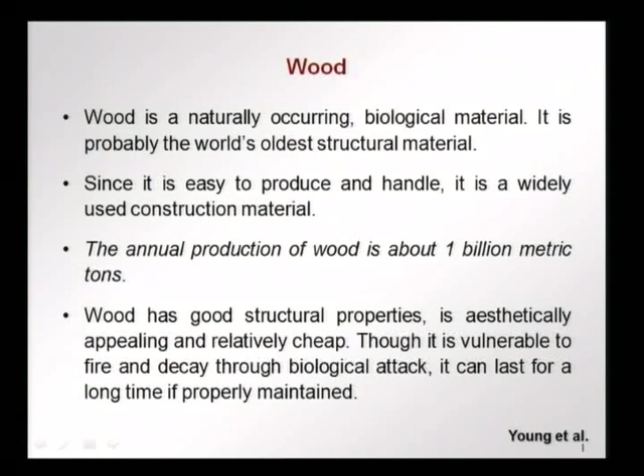Let us compare the properties of wood with some other materials. In this table, what we have done is looked at 4 different properties with reference to the density. So the materials that are compared are wood, mild steel, aluminum alloys and concrete.

In the first column, we have the Young's modulus divided by the density, or the elastic modulus normalized with the density, and you find that wood has a value of 20 to 30, same range as mild steel and aluminum, and better than concrete, which is obviously much heavier.

In terms of the tensile strength, again divided by the density or relative to the density, we have wood having values of 120 to 170, much better than mild steel and comparable to aluminum alloys, and much better than concrete, which is very weak in tension and also has a high density.

In terms of the compressive strength, again wood has good values 60 to 90, which is comparable to aluminum and much better than concrete.

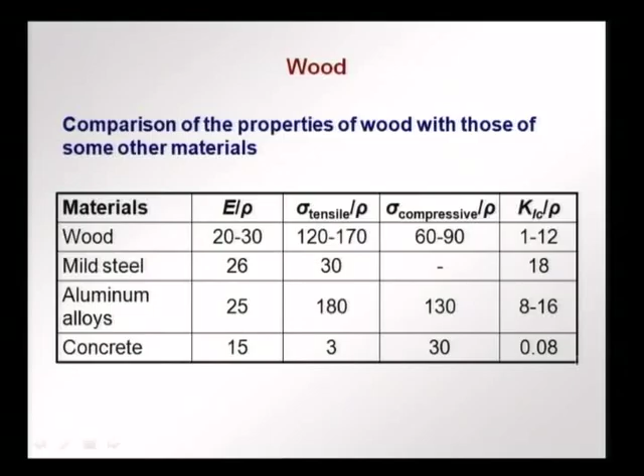So we find that in terms of unit weight, in terms of properties with respect to the unit weight, wood comes out very strongly compared to other materials, and therefore it is a structural material that has been used for a long time and will continue to be used as long as it is available.

Wood, however, is more complex than many other materials, because first of all it is a natural material. There are at least 30,000 species of trees, and many of these are used to give us construction materials, and this variability between the species alone leads to a tremendous variation in the properties of wood. So depending on the species of tree, we can have very different properties, and that is why we have certain types of wood which are more common in construction or more ideal for construction.

Wood is a composite material where we have a variety of properties at different scales, and therefore the analysis and the modeling is to a certain extent complex. Being a natural material, it can have a lot of flaws and imperfections, which again can control the structural behavior. Lastly, an aspect which makes wood again very different from other materials is that it is anisotropic because of the way the tree grows.

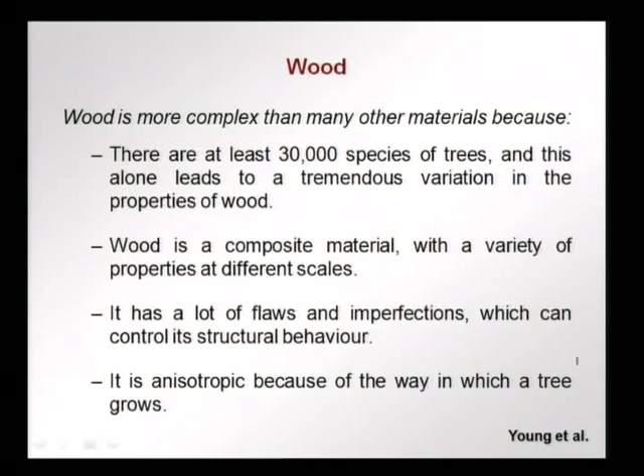Trees are divided into two broad classes: hardwoods, which are basically tropical broadleaf deciduous trees, and these have some porosity, they have vessel elements in the wood. Examples are teak, sal and oak. Softwoods are conifers, they have needle or scale like evergreen leaves, and they are generally non porous. Examples are fir, pine and cedar.

The fact that some are called hardwoods and some are called softwoods does not mean that the hardness of the wood actually changes. It is just a nomenclature to divide the woods according to how they grow and what they look like.

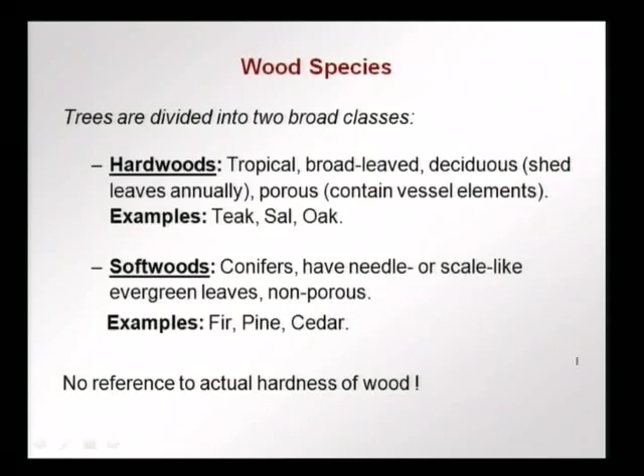Some common Indian species are given here: teak, which is a very popular wood which has an appealing brown color. It has good dimensional stability and natural durability, it is not attacked by termites very often, and it does not change dimensions when temperature and humidity change. The heartwood, that is the interior part of the wood, varies from yellow brown to dark golden brown. Then there is a wood called padauk, which is more red orange in color.

This is a medium density hardwood, and in some cases now we are finding lot of applications of rubber wood, which is a light hardwood, and after seasoning it becomes lighter in color.

So I have put some of the images of the wood here to see that we have a range of colors which gives different aesthetic appeal, and when you have a clear coating on the wood, the color and the grains are brought out. Here the design that you see comes from the grains that make up the wood structure.

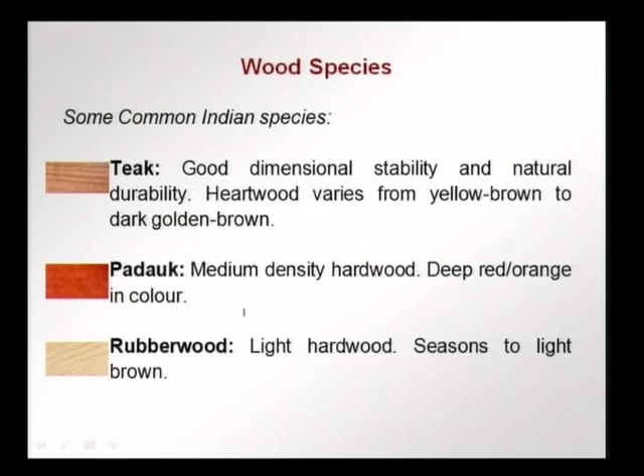There are other common species of trees that are used in construction in India. For example, sal, which is strong hardwood, dark brown in color; deodar, a light durable wood, light brown in color; and a wood that is used a lot in furniture because it is very expensive to be used in construction is rosewood. It is a heavy wood with high strength. The heartwood varies in color from golden brown to dark purplish brown with blackish streaks. So these and many other types of wood are used in India for construction.

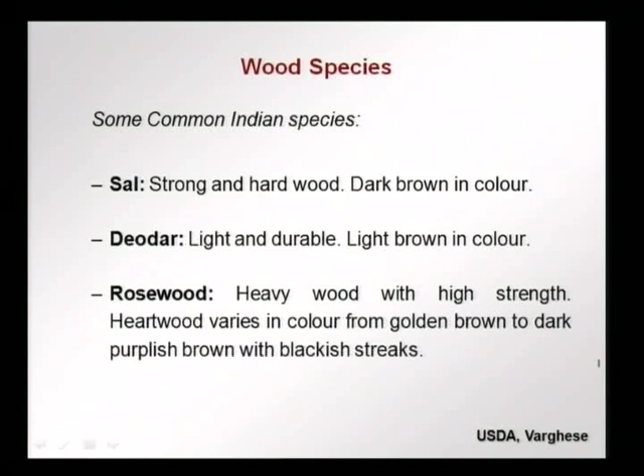Now in order to understand why we have the anisotropy and the variability in the properties of wood, we have to understand how the tree grows. All of us have seen trees, and basically you have a crown, the visible part above the soil, which is held up with a trunk, which is where most of the wood that we used in construction comes from. At the base you have an enlargement, there is a buttressed base, and in the soil we have a system of roots: a tap root and several roots at the side, giving us the lateral root system which holds up the tree, sucks up the water, and the capillaries take the water and sap up the tree to help the tree grow.

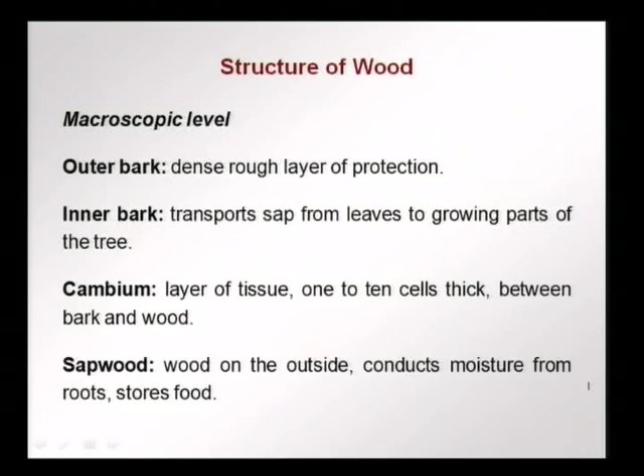So on the macroscopic level we can identify the outer bark, which is a rough layer of protection for the inside of the tree. The inner bark transports the saps from the leaves to the growing parts of the tree. The cambium is a layer of tissue about 1 to 10 cells thick between the bark and the wood. The sap wood is the wood on the outside, which conducts moisture from the roots and stores food. The heartwood is the inner core, which is non-living. It is harder, more resistant to decay and drier.

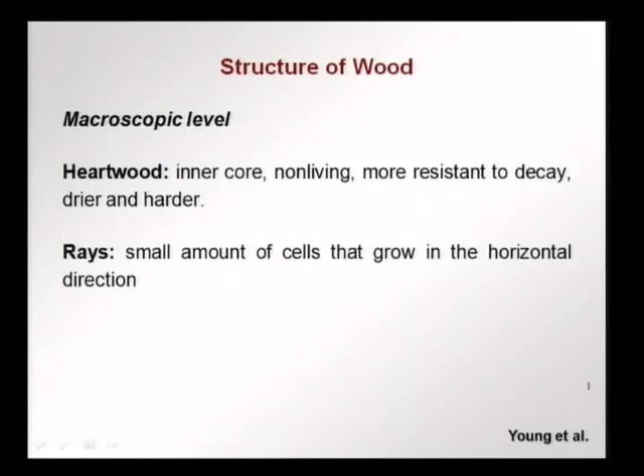Then we have a small amount of cells called rays that grow in the horizontal direction. So this is basically what we observe at the macroscopic level, and this gives us the different properties and the directionality of the properties, as we will see later.

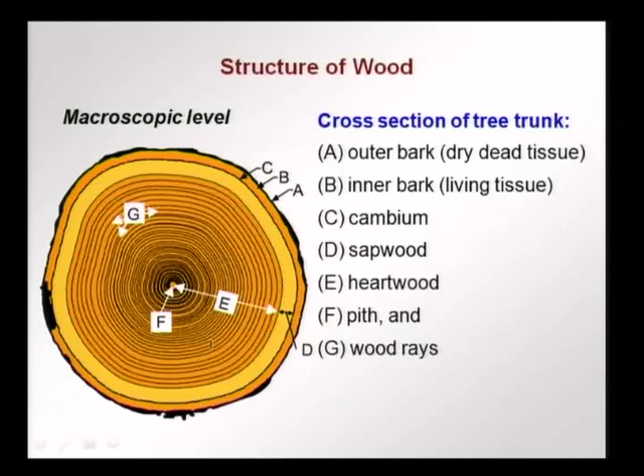The annual rings give the most distinct feature of the tree trunk. They also give a certain design and aesthetic appeal when the wood is cut across a ring. As the cells of the cambium grow and divide during the growing season, they form rings of cells around the trunk.

In spring, where there is more water and rapid growth, the cambium cells have larger dimensions with thin walls, and this is called spring wood or early wood. Later, when there is less water, the cells are smaller with thicker walls and end up harder and stronger. This is called summer wood or late wood. Since these differences occur over a year, we have a distinct look, the annual rings, which can be distinguished in the cross section of a tree.

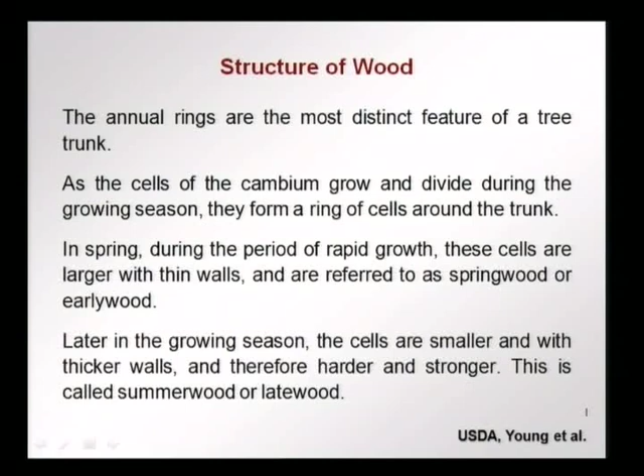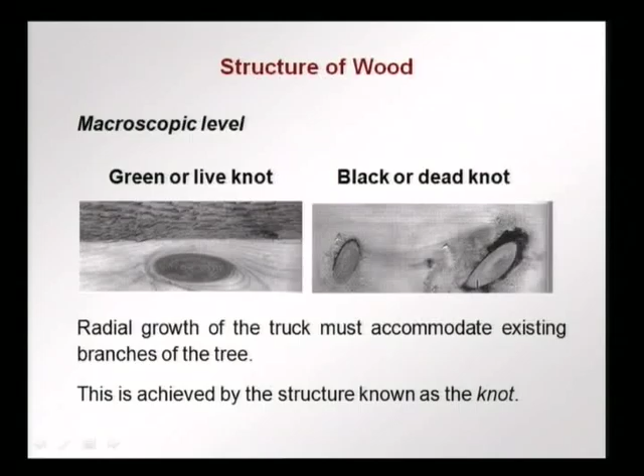Other than this, we have what are called knots. Knots are where a branch grows out of a trunk. You can have a green knot, where there is good integration of the knot with the rest of the wood, so there is no weak interface between the part where the branch grew from and the trunk. Or sometimes, when the branch grows, part of the bark of the branch is embedded in the wood of the trunk, giving a weak interface called a black or dead knot. When a plank is cut, this part can come out very easily because it is not bonded, it is not integral with the rest of the wood.

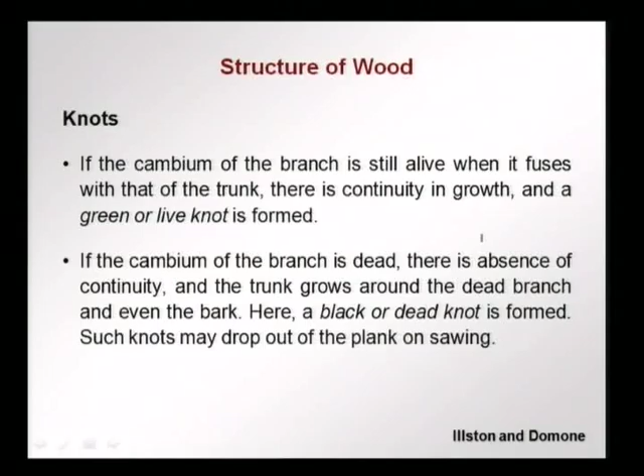A green or live knot occurs if the cambium of the branch is still alive when it fuses with that of the trunk, so there is continuity in growth. If the cambium of the branch is dead, there is an absence of continuity, and the trunk grows around the dead branch and even the bark, giving a black or dead knot. These knots may drop out of the plank on sawing or later, and this has to be avoided.

What did I say? I said something wrong, right? Let me start this again.

Wood is made up of cells that are bundled together, so it can be modeled approximately, or crudely, as a bundle of aligned tubular cellulose cells or fibers glued together, like a bunch of straws glued together making up the structure of wood. The middle lamella bonds the neighboring cells to each other. The cell itself has two walls: the primary wall is thin with randomly oriented microfibrils, which are bunches of polymers held together. The secondary wall has three layers: a thin outer layer, a thick middle layer, and a thin inner layer, with microfibrils oriented in different directions in each. Microfibrils again are bunches of polymer chains.

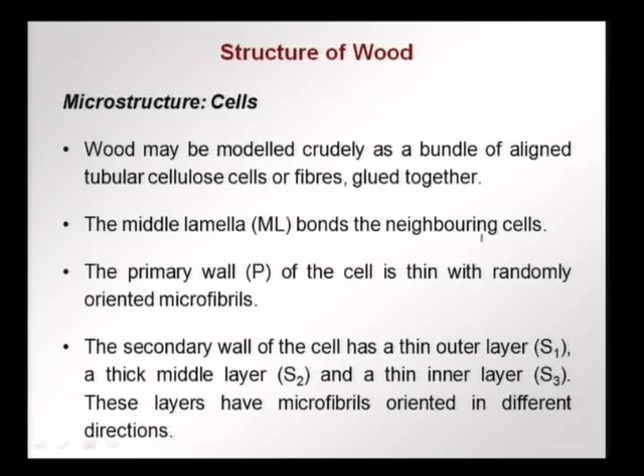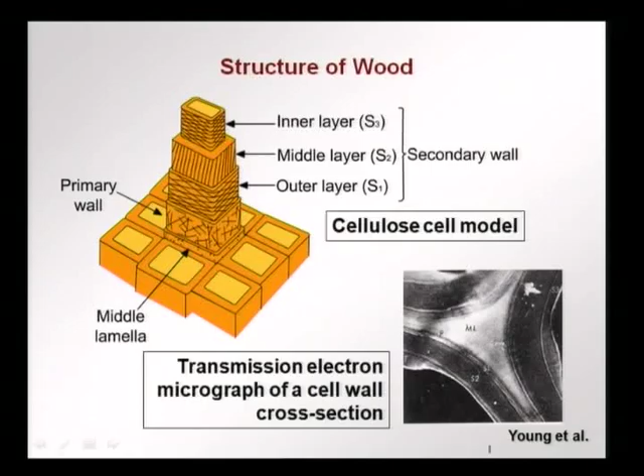What makes up the cells, or what are the different types of cells inside wood? In softwoods, 90% of the volume consists of longitudinally oriented cells called tracheids, along the axis of the tree. Then there are a few transversely oriented cells called parenchyma, perpendicular to the direction of growth. In hardwoods, the microstructure is more complex: they have tracheids and parenchyma, but in addition they also have fibers and pores.

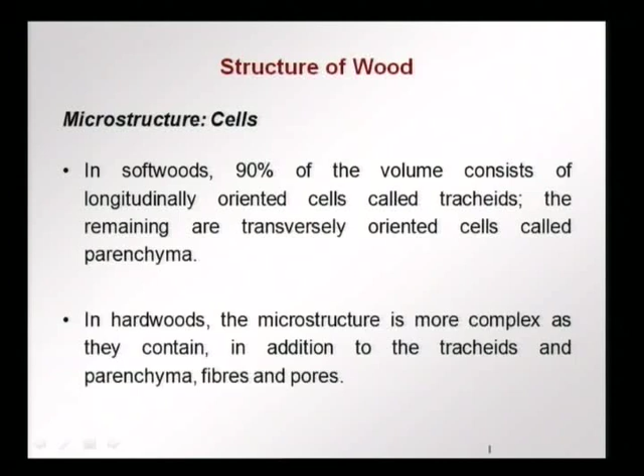The microstructure can be visualized this way - these are 3D images of wood blocks. In a softwood we have the tracheids and some parenchyma running in the other direction. In a hardwood, in addition to this, we have some fibers and pores also.

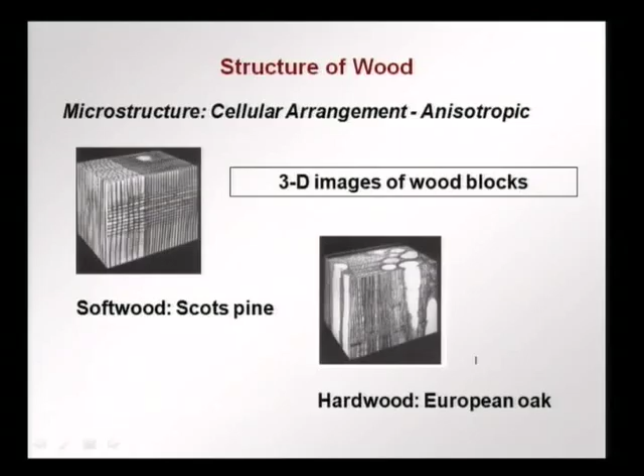These are the different types of cells found in softwoods and hardwoods. In softwoods we have tracheids and parenchyma. In hardwoods, in addition to these two, we have fibers and pores or conduction vessels. The function of each: parenchyma for storage, tracheids for conduction of sap and moisture and also for support, fibers basically for support, and large vessels or pores for conduction.

These are relatively how the shapes and dimensions look. The length of the parenchyma is very small, about 200 microns. The others are in the order of a millimeter to a couple of millimeters in length. The width of parenchyma, tracheids and fibers is about 20-30 microns. The vessels are wider, ranging to about 500 microns.

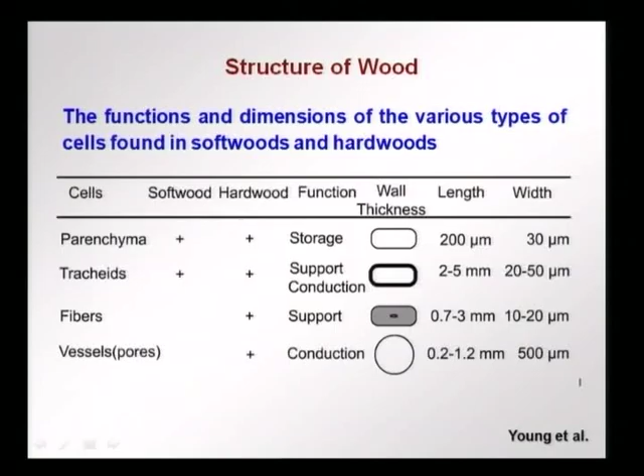So these are the different cells found inside timber. What makes up these cells? All wood is composed of cellulose, lignin, hemicelluloses and minor amounts of other extraneous materials in the cellular structure.

Variations in the characteristics and volume of these components, and differences in how they are put together in the cellular structure, makes the wood either heavy or light, stiff or flexible, hard or soft. So all wood has the same microstructural materials which build it up. The way they are put together and the relative proportions give us the different properties of wood.

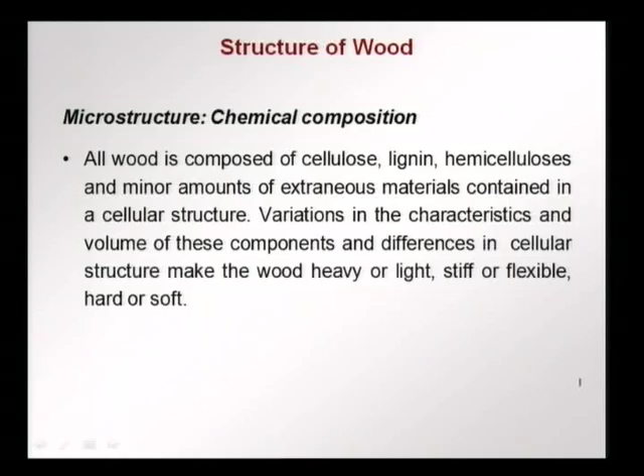Cellulose is the major component. It constitutes approximately 50% of the wood by weight - half the wood weight comes from cellulose - and this is a high molecular weight linear polymer built from glucose monomers. When something is a linear polymer, you can have some amount of crystallinity, an arrangement possibility for these molecules. During growth the cellulose molecules arrange into strands called fibrils, bonded together by a combination of hydrogen and van der Waals bonds, making up the cell walls of the wood fibers. Most of the cell wall cellulose is crystalline - an orderly arrangement - but some part is non-crystalline, though most happens to be crystalline.

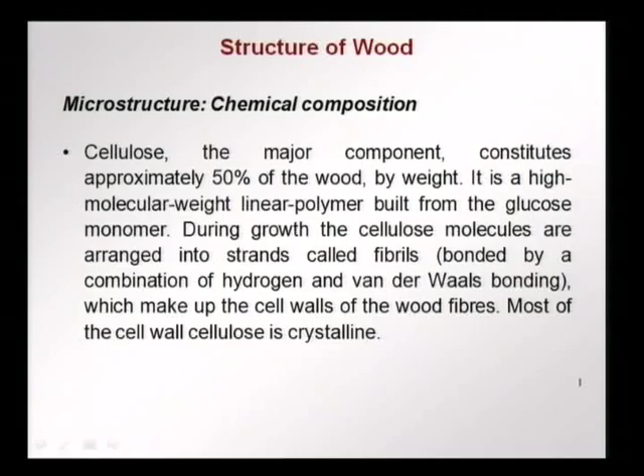Lignin is the gluing material that binds the cells together. Lignin constitutes 23 to 33% of softwood, 16 to 25% of hardwood, and it is the cementing agent that bonds the cells together. Lignin is a 3-dimensional phenylpropanol polymer.

We also have hemicelluloses, which are branched low molecular weight polymers, and we can have low quantities of extraneous materials like oils, resins, fats, calcium, potassium and magnesium.

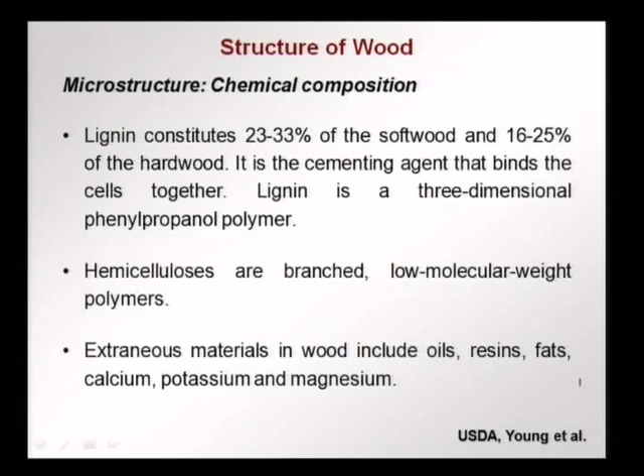This is the relation between what happens at the nanoscale and what happens at the microscale. We have a tracheid here, say a softwood cell a few millimeters long, and if you look at the cross section you see the cell wall - the outside is the primary layer, and then we have the secondary wall with 3 different layers, and within the layer you have these cellulose chains bonded together as microfibrils.

Most of the region is crystalline - you can have lengths of about 30 to 60 nanometers of crystalline regions - then small non-crystallinity comes in where there is disorder, and together this makes up the microfibrils, again a few nanometers in width. This builds up to give us the cell wall.

Now if we were to take a longitudinal section, it would look like this, where you have the chains of cellulose. A cross section again shows us these cellulose molecules which make up the microfibrils. So at a very basic level we have polymer behavior which leads on to the behavior we see in terms of the properties of wood.

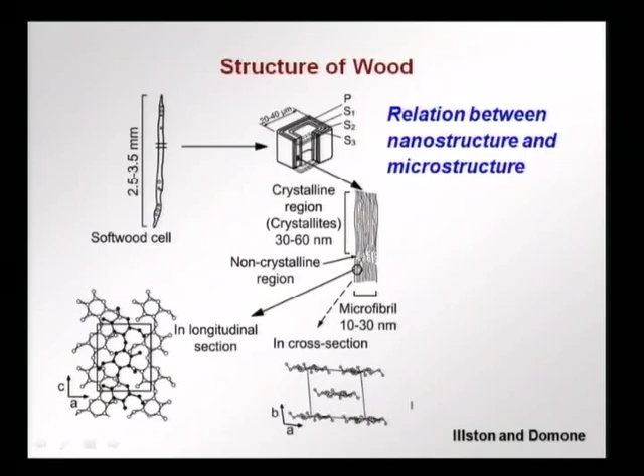So we saw that wood is orthotropic in nature, that is along the direction of growth it will have different properties than in the radial and tangential directions. This is because of the way the tree grows.

There are therefore now 9 independent constants that are needed to describe the elastic behavior of wood. In an isotropic elastic material we would just need 2 constants, the Young's modulus and the Poisson ratio, but here because of the directionality and orthotropy, the behavior is different in the longitudinal, radial and tangential directions.

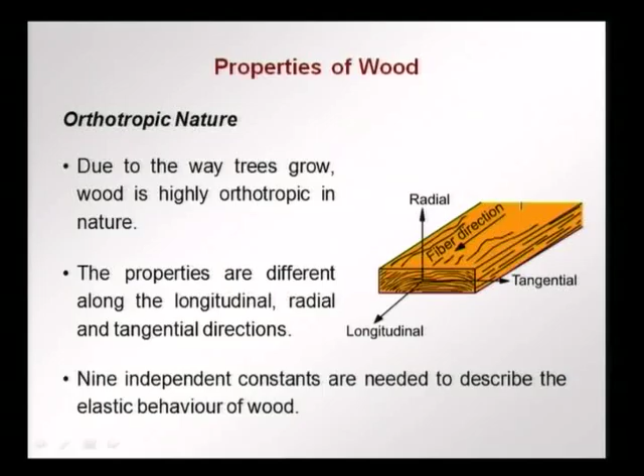We need now different elastic properties depending on which direction we are considering. Again, the longitudinal direction is the fiber direction, or grain direction, and this is the direction that the tree trunk grew.

Depending on how the log is sawed, how boards and planks are made, you have a quarter sawn board that is from the middle almost along the diameter, or a plain sawn board which is at the outside of the tree cut across like this, you can have the grains oriented in different ways. This affects the properties and also the look of the wood. So the way of sawing affects the properties of the timber as well as the decorative features.

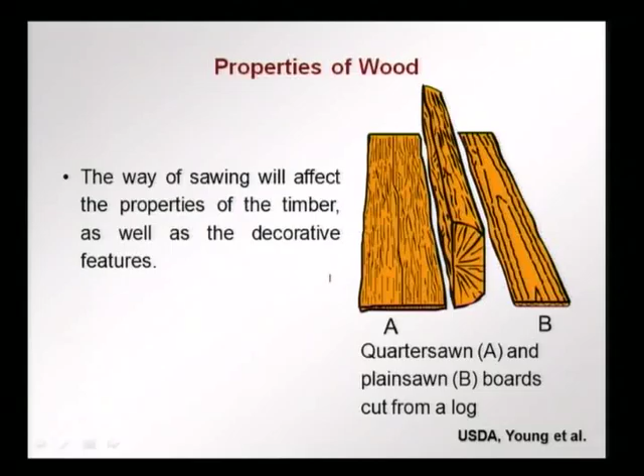Let us start looking at some of the properties of wood. The specific gravity is a very important property because many of the engineering properties are related to specific gravity or relative density.

For all species of wood, the specific gravity of the cell wall material itself is about 1.5. This does not vary from one type of tree to the other. The specific gravity of the cell wall itself is always about 1.5.

However, there is a lot of void space and porosity which changes the specific gravity of the wood from 0.04, which is the case of balsa wood, very light, to something denser, about 1.4 for a species of tree called Lignum vitae.

These differences between species are due to variations in void space and porosity within the geometry of the wood cells and their grouping. Remember, we had talked about the differences between softwood and hardwood. So there are a lot of variations in how the cells are put together, the type of cells, and their relative proportions in the wood, which give rise to different specific gravities.

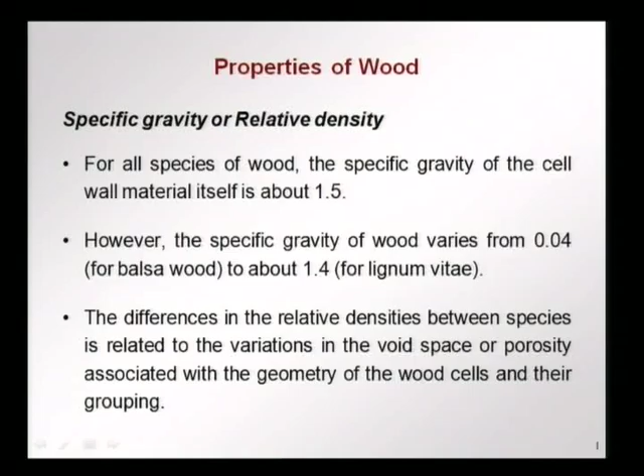Specific gravity, as I said before, is a good indication of the mechanical properties. Within the same species, mechanical properties vary linearly with specific gravity. That is, if you take teak wood, a particular teak wood with a higher density, higher specific gravity, will have better mechanical properties than another teak wood with a lower specific gravity. That is what this means.

Other than the mechanical properties, another significance of specific gravity is that lower specific gravity gives more ease for cutting the wood with a sharp tool. So if engraving, sculpturing, or intricate elements have to be made out of wood, it is better to use wood with a lower specific gravity, because it has less density and is easier to shape.

However, for structural purposes, we want better mechanical properties, and therefore we go with a wood of higher specific gravity.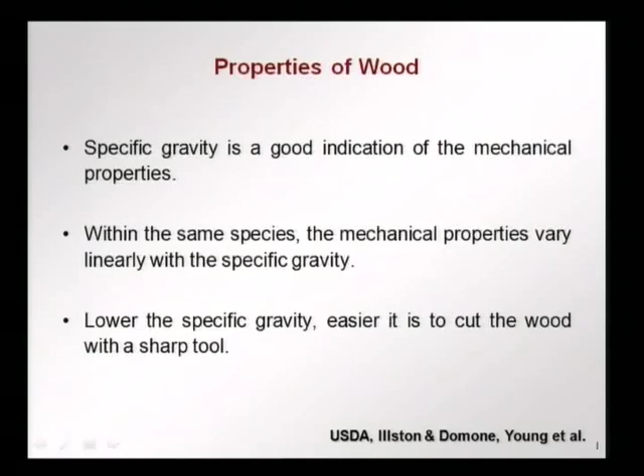In terms of moisture content, it is very important to understand the different effects. Initially, as soon as a tree is cut, the moisture content of green wood, that is fresh wood, is very high. It can range from 60 to 200% depending on the type of wood and how it is grown. So there is a lot of moisture in the wood.

Green timber, that is freshly cut timber, will yield moisture to the environment, that is, it will lose moisture to the environment because the environment is generally drier than the timber itself. Consequently, it shrinks, that is, it changes its dimensions.

So obviously we cannot use fresh timber in a structural element and allow it to lose moisture and change its dimensions. Later on we see that this is the reason why we season timber and reduce the moisture that is there.

For every combination of relative humidity and temperature of the environment, there is an equilibrium moisture content of the wood. That is, if the wood is left in an environment for a long time, it will reach a certain moisture content that is in equilibrium with its environment. It will not continue to decrease or increase much more as long as the environment does not change.

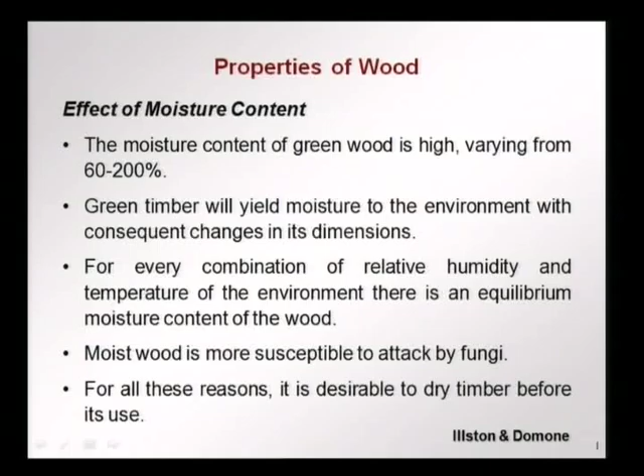So, for all these reasons we want timber to be dried before its usage. The process of drying the timber is called seasoning, where there is controlled drying done to remove the sap, reduce the moisture without causing cracks and distortion, because if there is sudden drying, if we were to do this drying very quickly, the process of removal of the moisture will cause cracks and a lot of distortion.

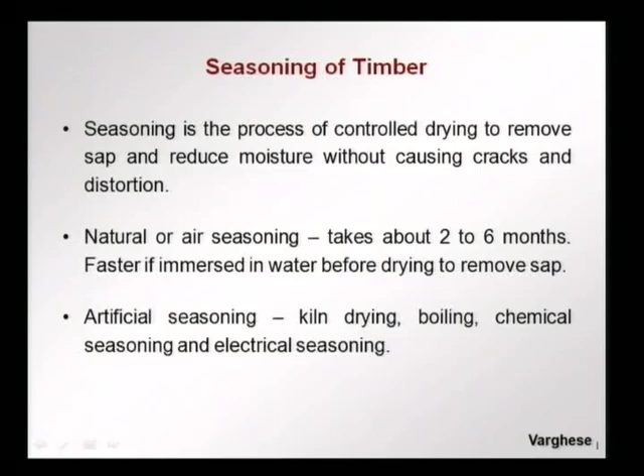Natural or air seasoning takes about 2 to 6 months. It is faster if it is immersed in water before drying, because all the sap comes out into the water and drying is faster. This is what was traditionally done, but there can be artificial means of seasoning by using kilns, boiling, using chemicals for the seasoning, and even electrical seasoning to create heat within the wood to drive off the moisture. So, seasoning is something that is very important, and for construction purposes, even for making furniture, we always use properly seasoned timber.

So, what happens during this drying? Moisture in wood exists in two forms: free water within the cell cavities in the hollow parts of the cell, and bound water which is adsorbed in the cell walls. So, there is some water in the cell walls bound to the polymer molecules. As the green wood dries, as the freshly cut wood is seasoned and allowed to dry, first the free water evaporates.

That is the water that is not bound, which is within the cell cavities, comes out first, and we reach a certain point called the fiber saturation point, where all the free water has been removed, but the cell walls are still saturated. We have removed all the water from the interior of the cells, but the walls themselves are still saturated with water. This generally occurs at moisture contents of about 25 to 30%, that is called the fiber saturation point. Until that point in time, the properties do not change much and there is not much shrinkage when you are removing the free water.

If we continue to remove water, further removal of moisture compacts the molecular structure, leading to better hydrogen bonding. So, the molecular chains now are free of water that is separating the molecules, they come closer together and the hydrogen bond becomes stronger. Consequently, the wood shrinks and becomes stronger, the properties become better.

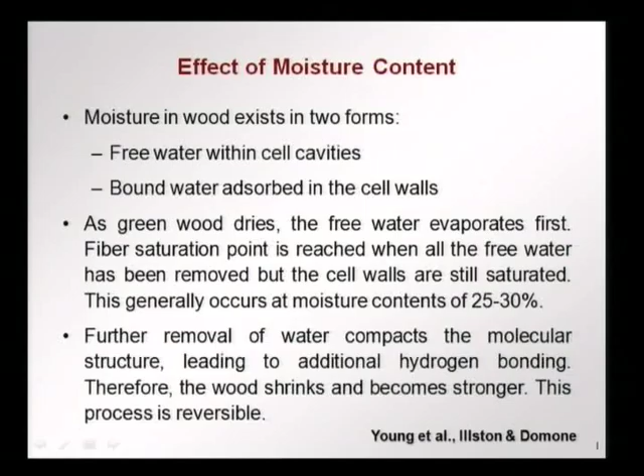And as we remove moisture, say we have a green wood with about 100 or 120% moisture content. We start removing the water, we remove the moisture, and now we are first removing the free water. So, we remove the free water, the strength does not change much with this change of free water content.

Then we reach the fiber saturation moisture content, fiber saturation point, and if we continue to decrease moisture even beyond this, now this is about 25 to 30%, then we find that now the cell walls are drying, there is compaction of the cell walls, the molecular chains are coming closer together, there is better hydrogen bonding, and therefore the material strength increases. So, if we decrease the moisture content much below the fiber saturation point, we have an increase in strength, and this is what we want.

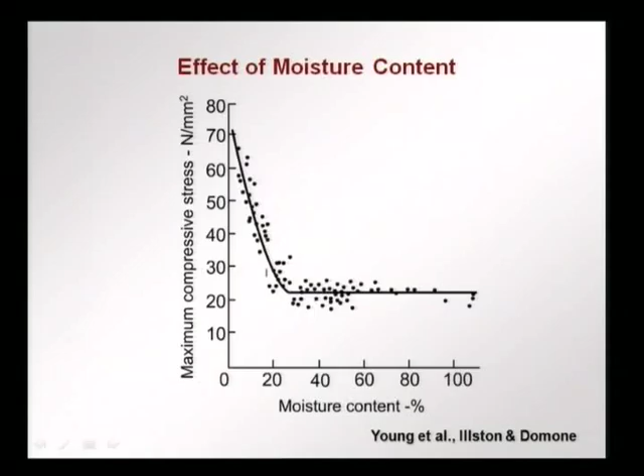This is what we want to achieve by proper seasoning, and this we find in many other properties also. This is a graph from the USDA document showing different properties such as tensile strength parallel to the grain, bending strength or modulus of rupture, compression parallel to the grain, compression perpendicular to the grain, and tension perpendicular to the grain. We find that in all cases there is a decrease in the property as the moisture content increases.

During seasoning we first remove the free water, and then as further moisture is removed we have an increase in the strength. Only in the case of tensile strength parallel to the grain do we have a reversal. When the material becomes very dry it becomes brittle, and you can have tensile failure at very low moisture contents, but otherwise the trend is always the same: as we remove water, until the free water is removed there is no change in the property, and afterwards as we remove the cell water or bound water, the property becomes much better. So this is what we achieve during seasoning.

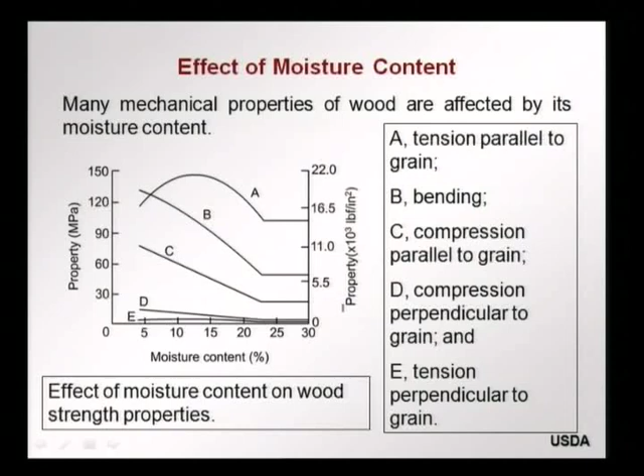Along with the reduction of moisture content, the wood experiences a dimensional change or shrinkage. When changes in moisture content occur above the fiber saturation point, the dimensional stability does not change, but below the fiber saturation point, if the moisture content is lowered, there is volumetric shrinkage of wood which is approximately proportional to the volume of water removed. So the wood shrinks proportional to the volume of water that it loses.

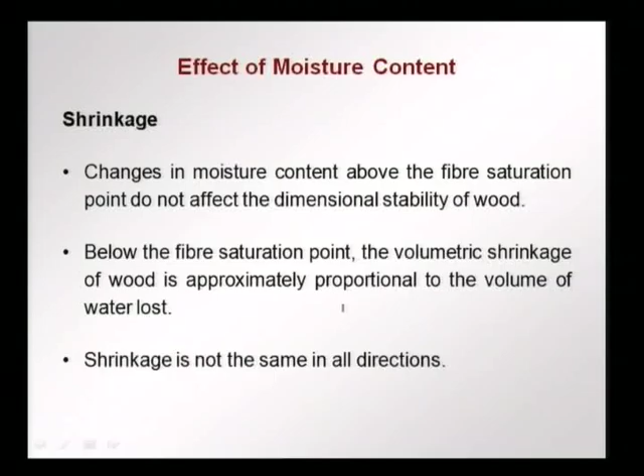Shrinkage is, however, not the same in all directions. In the longitudinal direction it is the least, and it is more in the other directions. This shrinkage is important because during seasoning of a timber piece, since we have differences in shrinkage in the three directions of wood, we will have distortion or warping of the element.

In the tangential direction, we have shrinkage that is almost twice that in the radial direction, and both of these are much higher than the shrinkage in the longitudinal direction, that is, along the direction of growth of the tree.

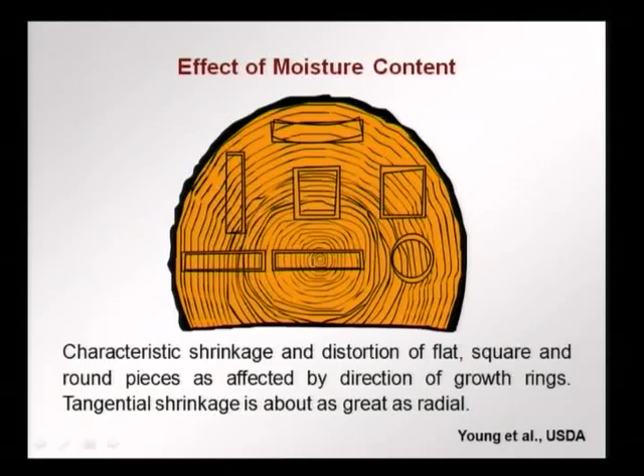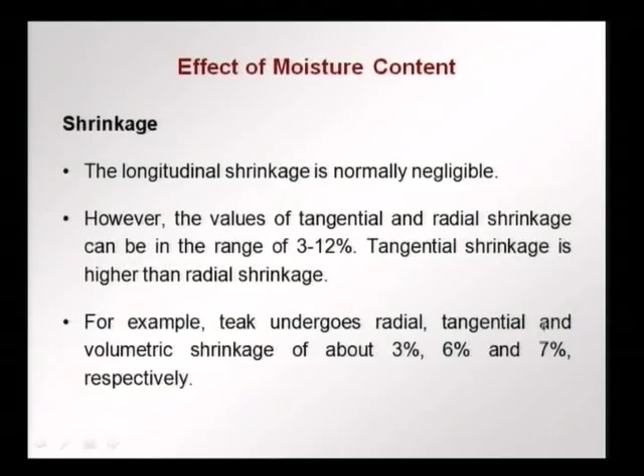If we look at values, the longitudinal shrinkage is very small, normally negligible. However, the values of tangential and radial shrinkage, these are strains, can be in the range of 3 to 12%, with tangential shrinkage being higher than radial shrinkage. Some values for teak: radial shrinkage can be about 3%, tangential shrinkage can be 6%, and overall volumetric shrinkage can be about 7%. The shrinkage in the longitudinal direction is almost nothing for teak wood.

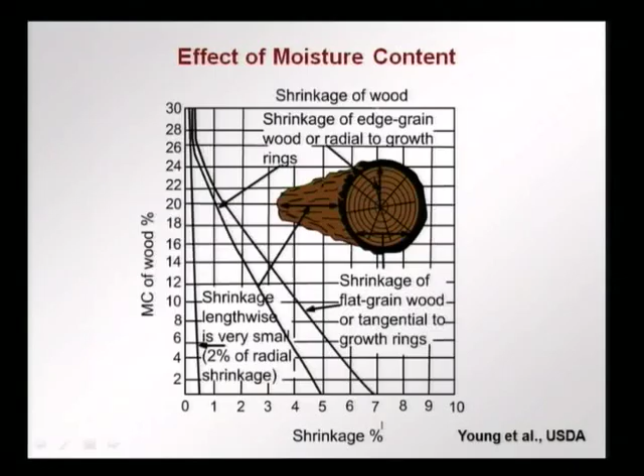So we have looked at the microstructure of wood, and we have seen why there is a lot of variation and anisotropy in wood. In the second part of this lecture, we look more at the properties, typical values, and applications of timber, and we will end up also talking about composites that can be made out of pieces or particles of wood. Thank you.